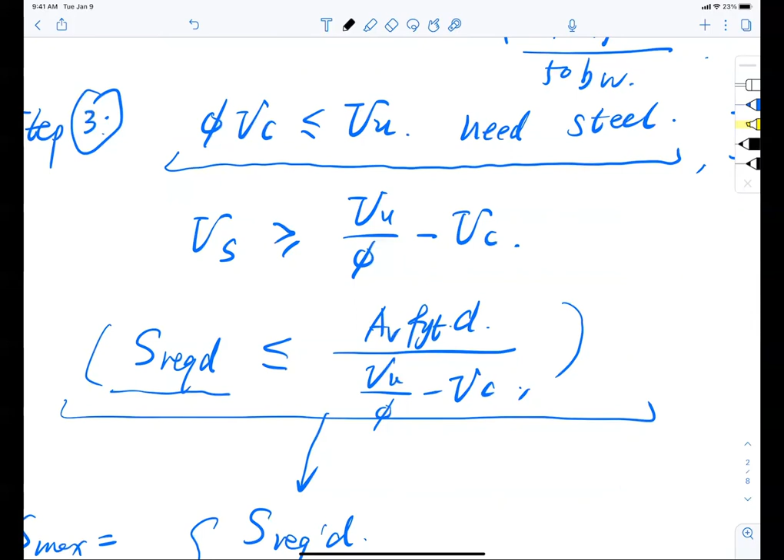What is the equation for the required spacing anyway? The required spacing is right here. That is A V F Y T D divided by VU over phi minus VC. That is required shear resistance from the steel, right? So that is the added term to those 4 terms, so it becomes 5 terms.

All right, so keep going. Now we have that. What if my steel VS is greater than 4 times square root F prime C B W D? What happens? The rest of the 3 terms in the lower position of the column stay the same, but the first two terms change by half, reduced by half. So it's no longer 24 inch, but 12 inch. It's no longer half of the depth, so a quarter of the depth.

Now, last but not least, if my VS is greater than 8 times F square root F prime C B W D, what happens? Increase the section size. So when we try to change the section size for flexure, which dimension do we go for?

Depth or width? For flexure, depth, right? For shear, which way to go? Either one, right? But we usually go with what? The width. Why is that?

Because for T-beam and I-beam, increased width does not increase the occupation of area or space that is so precious for civil engineers nowadays.

You heard this. What is the most important thing about real estate? What determines the price? Heard this before in House of Cards, right? We watch House of Cards. Location, location, location, right? So everything we work with as civil engineers is about locations, about how big a piece of land the investor bought, right?

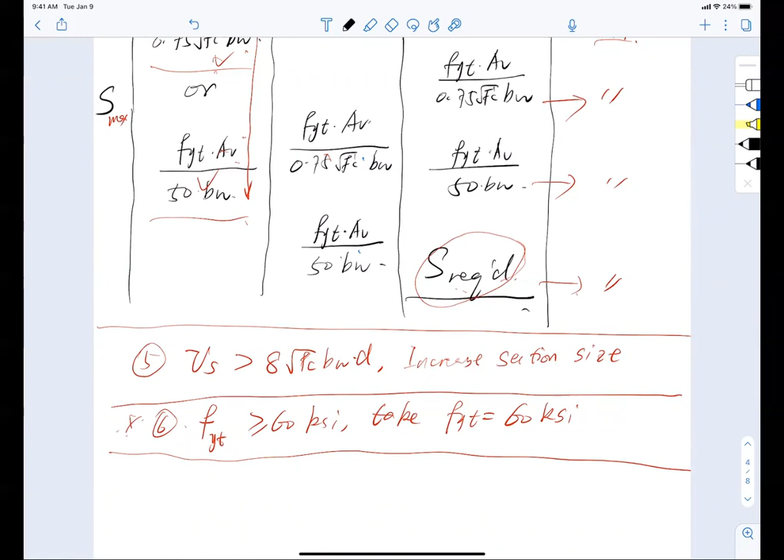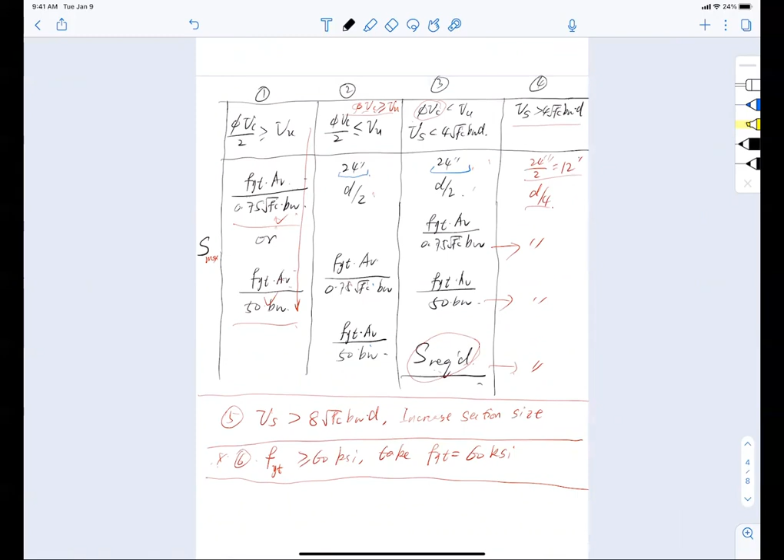Okay, get that. Last but not least, I forgot to mention this: if the yield strength is greater than 60 KSI, take 60 KSI for the calculation, that's it. Our life in terms of shear design is pretty much confined by this tiny table here. It's not too bad, isn't it? Now let's start showing an example, right?

We show the example where we have the critical section about D away from the support. We draw the 45-degree angle always like this, that's how the crack happens. I will ask you guys to draw these cracks in the exam on the critical sections, right?

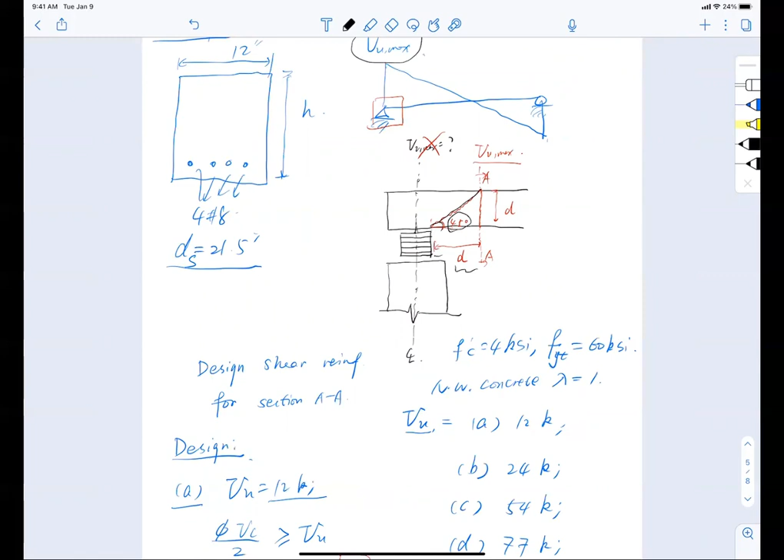So this is kind of like the Japanese animes, right? So you do this sign, right? You do this sign, right? You never do this sign, right? That's too awkward, right? You do this sign, right? Meaning a 45-degree diagonal crack like this, okay? I don't want you to draw like that. Always like this, okay? We'll go through that later.

But anyway, that's where we start. And we say now the concrete is 4 KSI, yield strength is 60 KSI, normal weight concrete, be careful.

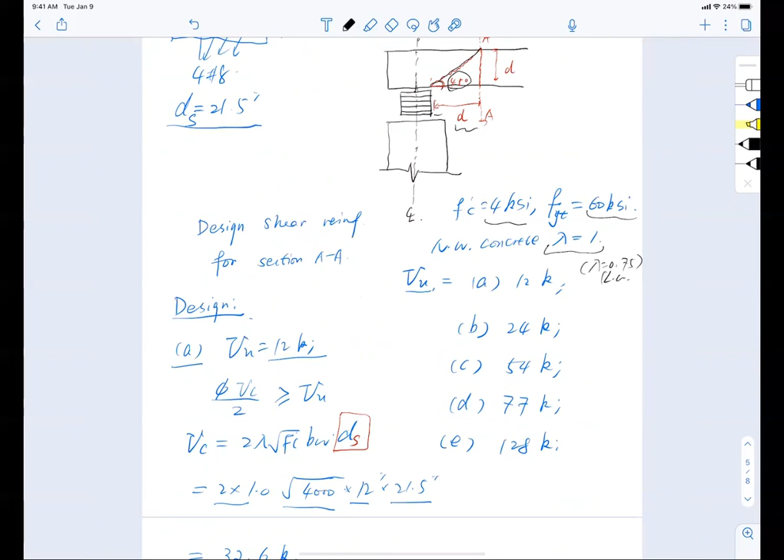This is the best part. I always trick my students. Sometimes I say lightweight concrete at the end of it and don't tell you what that means. That means lambda equal to what? Lambda equals 0.75 when it is lightweight, right? You're not smart, right? You're just okay, right? So you have to pay attention, all right?

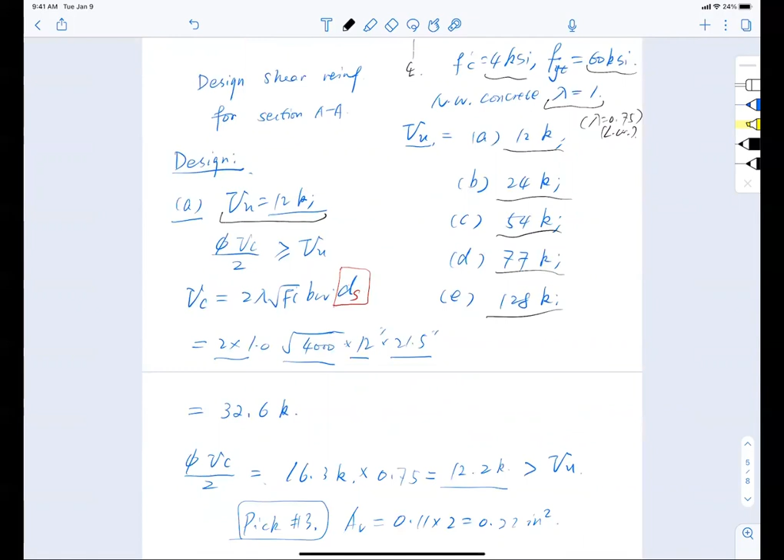Now, we talked about last time, we had 12K, 24K, 54, 77, 128, and so on and so forth. So first thing we do is find out the applied shear, 12 kips, and check whether half of my concrete resistance satisfies this or not.

So it turns out I'm okay, right? Half of this resistance from concrete alone can take care of the applied shear, and we can pick bars. For the sake of convenience, I'm just going to pick number 3, and it gave me a 0.22 inch squared steel area. I went down to find the maximum spacing, which has to be lesser of these 2 minimum requirements, and that gives me 22 inches.

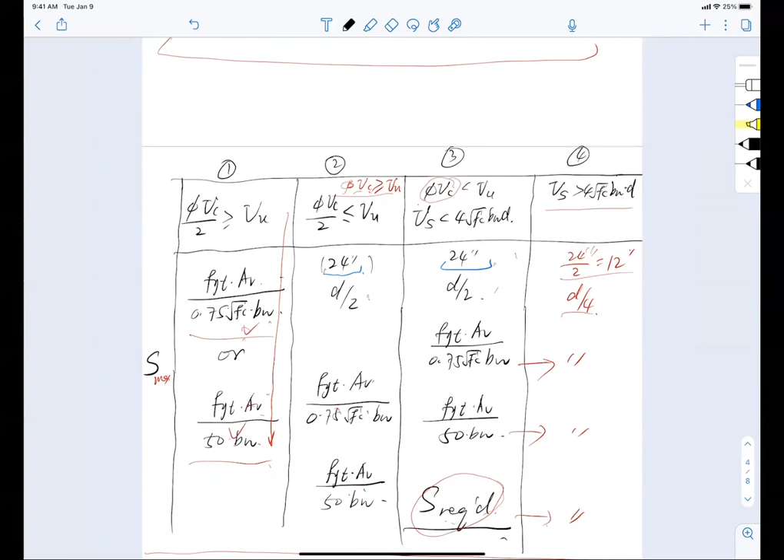When I see 22 inches, I'm okay, I'm happy. Why? Because this number is smaller than 24. Even though this is practice, when you do design you can come up with some weird numbers. For this column, remember there's no constraint about 24 at all for column number 1 — you just need to provide minimum. But still, in practice, as a good civil engineer, I always maintain my spacing lower than 24 inches just to be safe. Call me paranoid, but this is what I do, just to make sure I'm on the safe side. I think that's good practice — keep it below 24 inches.

So then we jump up our shear to 24 kips, and we say, okay, apparently half of the concrete does not cut it. I need to have steel, right? No, not yet. That just means my half of the concrete does not cut it, meaning I need to provide a little bit more reinforcement. It does not mean I have to calculate how much reinforcement I need to apply. Do you understand the difference? Meaning I don't need to calculate, but I need to provide a little more than just minimum.

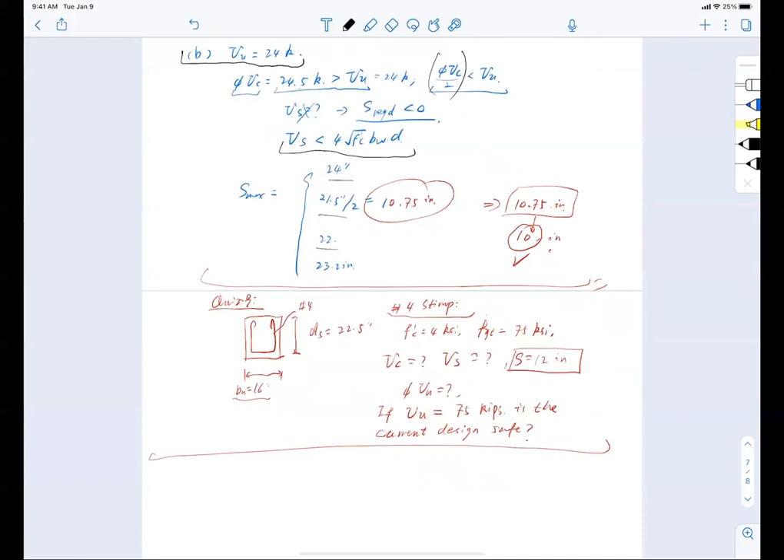So I go on with that idea, I say fine, but I check that steel is definitely smaller than that. So I have 24, 21.5, that is depth divided by 2, then the previous 2 minimum spacing, then I pick 10 inches. Out of this 10.75, calculated from the depth divided by 2, I pick 10 because it's smaller than the calculated numbers. Then I'm left with a quiz, and today we'll continue. Then C.

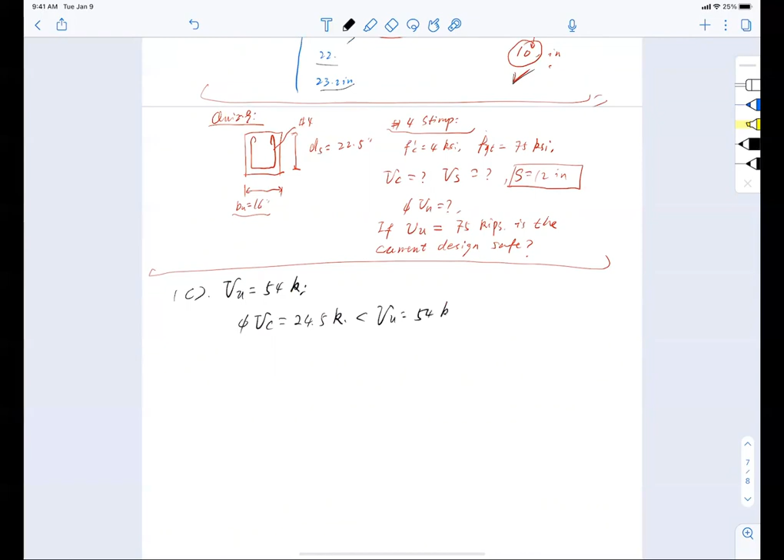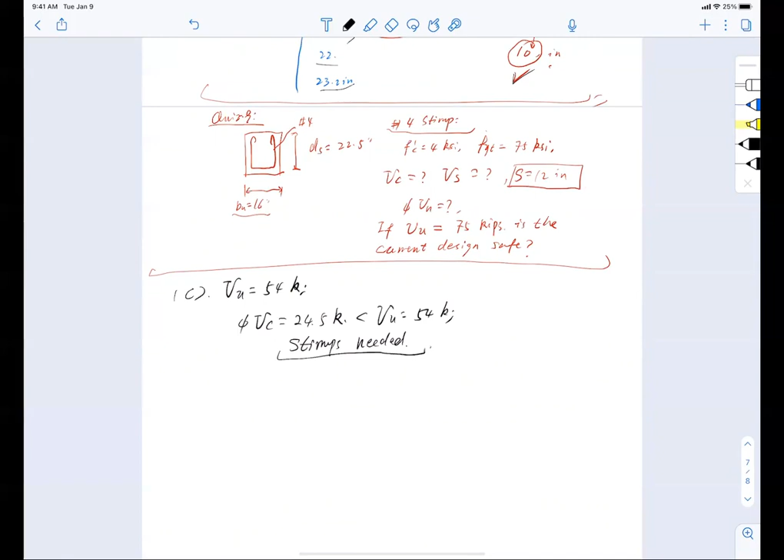When we have VU that is 54 kips, what happens? So now from the previous calculation, I know that phi VC equals 24.5 kips, and that pretty much tells me this shear itself does not work anymore, because this one is definitely smaller than the 54 kip shear force. So immediately I say, well, you know what, stirrups needed. No way you can get out of this one, Bob. Just need to provide stirrups. And to be precise, I need to calculate it.

So how do I calculate it? First, I need to calculate the so-called required shear resistance for steel, VS required. How do I get that? That is basically VU divided by phi, minus VC. So what is VU? 54 kips divided by 0.75, minus VC that is 32.6 kips I previously calculated, and that left me with 39.3 kips. So that is how much shear force I need from the steel.

At this point, should I start calculating my required spacing? Yes, I can do that. And that is AV times FYT times depth D, divided by VS required. So bring the numbers in — I'm picking number 3 stirrup, 0.22 inch squared, FYT 60 KSI yield strength, 21.5 inch depth, divided by the required shear force of 39.3 kips. Folks, check the units: inches squared, KSI or kips per inch squared, inches and kips — so I'm fine, units are balanced. Continuing with this, I got my required spacing S required equal to 7.26 inches.

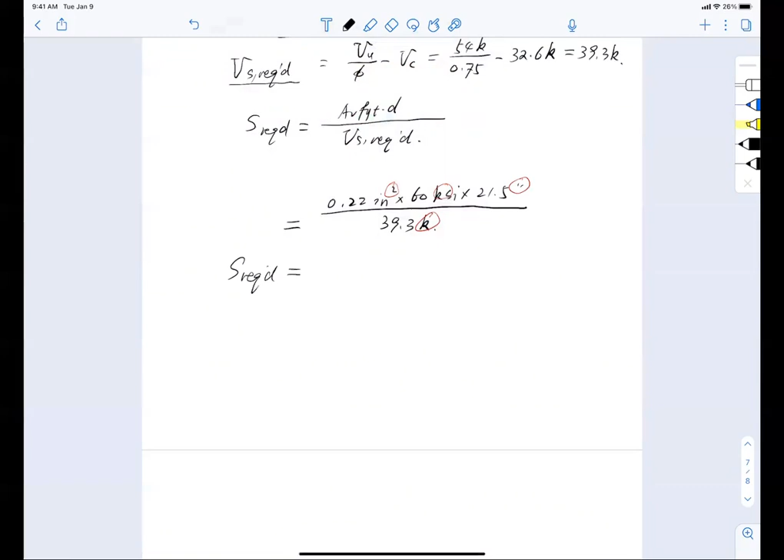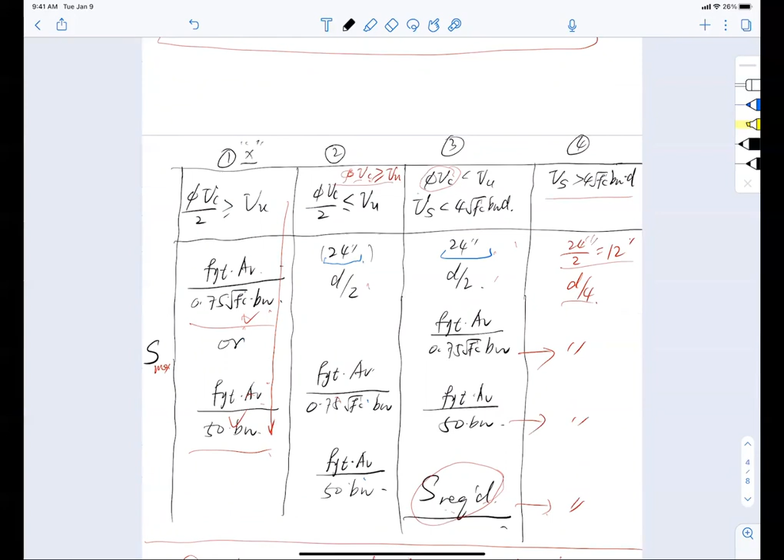7.26 inches. So at this point, I calculate the spacing between stirrups needed based on my required shear force, but I don't know yet if that's the final answer. Why am I saying that? Because I need to go back to my table and see where we are at. So now we're definitely not in category number 1 anymore, because half of the concrete does not cover it. Are we in category number 2? No, definitely not — it's more than that, we need steel. Come on, Bob, wake up, right? Need steel. All right, well, I got you steel. Are we in number 3? Maybe, because you arranged the problem like that, Bob.

But I need to check, right? So what is the criterion? What is the difference between number 3 and number 4? Which one is the criterion? 4 square root f prime c, BWD, right? I need to check that. And just when I'm doing that, might as well take a look at this as well, right? Whether I need to change my section at all. So these are 2 criteria I need to check.

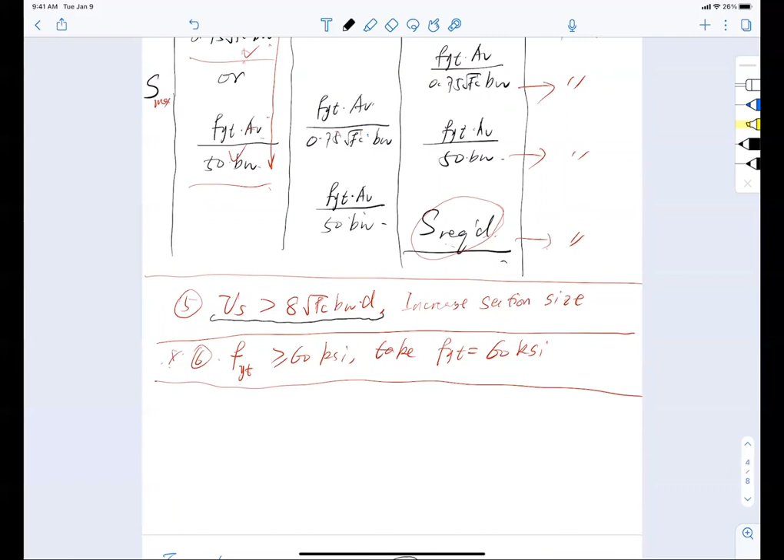So here I'm doing a check first. All right, let's do a check. First thing I need to check is to make sure that my VS required is calculated at 39.3 kips. And it is smaller than what? 8 times square root f prime c. I start from the bigger one, right? And I can calculate it and it tells me it's 130.6 kips. So I'm okay, meaning I don't need to change my section.

Happy with it. And then how about VS required? That is 39.3 kips again, whether it is smaller or greater than 4 times the square root of f prime c BWD. And that essentially is 130.6 divided by 2, and I get this number 65.3 kips. And of course, it is again checked.

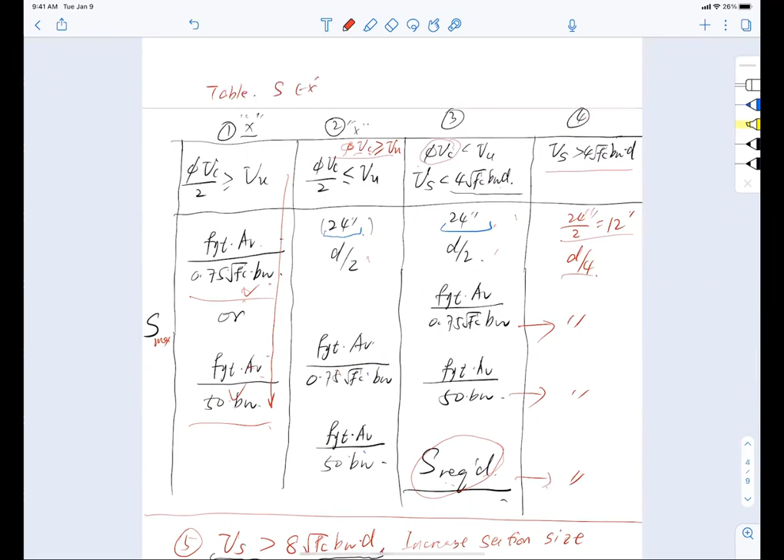So now I can say, by the table, and this is my own table, so I'm just going to call it table star. Whether you like it or not, you can name yourself, right? So this is table spacing. Just call it that. And then I am here in my category number 3. So I know now my spacing has between S max equal to the least of, remember those terms, 24 inches, D divided by 2, we know that is 10.75 inch.

And the 2 small ones, FY, T, AV, D. Do I have a D or not? I can't remember, let me see. I don't, that is 0.75. And the bottom here, square root of f prime c, BW, and that is 23.2 inch. And I have AV, FYT divided by 50, BW, and I got 22 inches. And don't forget, we just calculated S required, 7.26 inch.

Now, out of the 5, which one governs? Which one is the control value? Which one should I go with, 23.2, 24? No, right? You're not dumb, right? I am the only one who's not smart here, right? Which one is the good one? 7.2. Okay, so you know that this one governs, because this is the smallest one.

All right, so I am going to give spacing now. So I need to pick a spacing S that is smaller than this maximum spacing, which is 7.26 inch. So if you were the contractor, what spacing would you pick? I get a 7, it's a 6. Do I get a 6? Why go with 6? It's just easy, right? Hopefully. So I will go with 6 inches to make sure that 7.26 is satisfied.

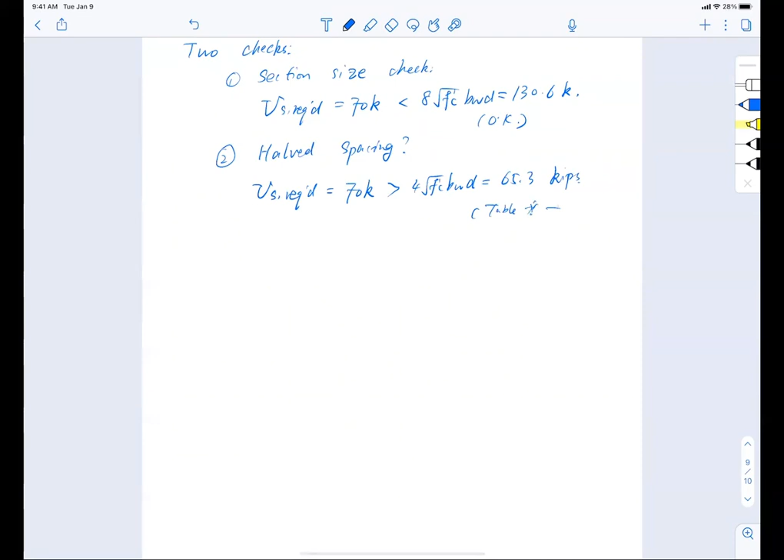What is category 4? That means, and I use red here to remind you, reduce spacing by half. So what do I mean by reducing the spacing by half?

That means my maximum spacing now is the least of, and the bottom 3 stay the same. That is AVFYT over 0.75 square root F prime C BW, and AVFYT over 50 BW, and S required 7.26 inch stays. So this is 22, and this is 23.2, maybe reverse, can't remember now, but you get the idea, 22 inches.

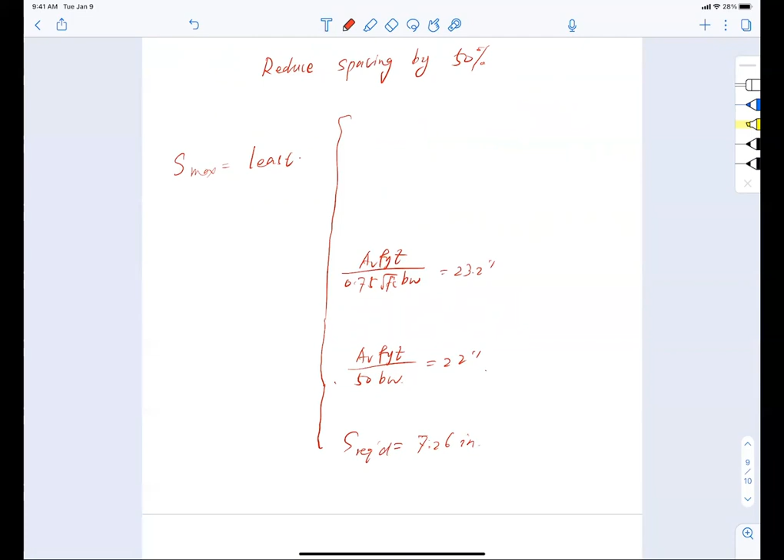But now only 2 numbers need to be halved, okay? Only 2 numbers need to be halved is what? Let me save this one, it's not 7.26, let me save this one. The only 2 numbers need to be halved is 24 inch divided by 2, that is 12 inch.

And D divided by 4, that is 21.5 divided by 4, and I have a 5.3 inch. Ooh, that's awfully small. But we're not done yet, because the S required is different from the previous one.

You have to recalculate it. It's AVFYT multiplied by D, divided by VS required. And VS required has become 70 kips. AVFYT is 0.22 inch squared multiplied by 60 KSI multiplied by 21.5 inch. And I got this number to be 4.1 inch.

Now you look through all these numbers, which one governs? 4.1 inch governs, so this one fellow is our friend. So now I say S better be 4 inch, controlled by this 4.1 inch spacing. So for me now we say design is number 3 at 4 inch.

All right, not too bad, right? So we're happy, we're okay. All right, now naturally let's bump up another level. I want to see what happens. I want to bust my section. I want to fill it.

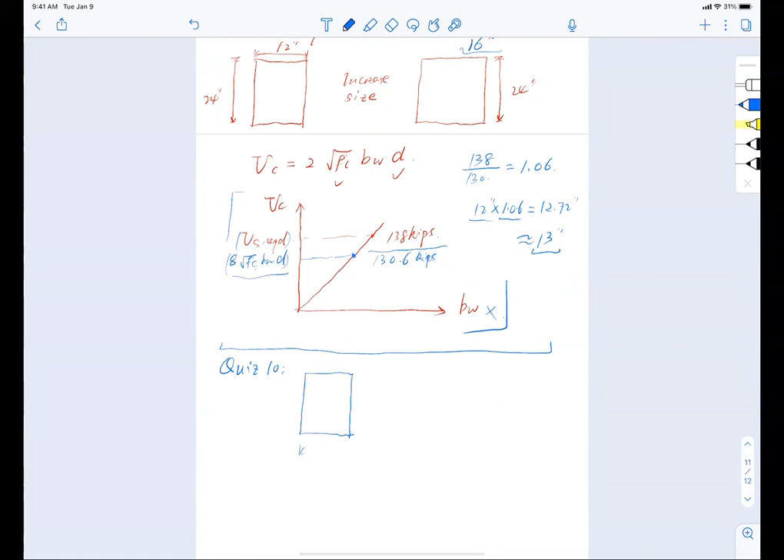Okay, I want you to try this, right? But this time we'll have 16 inches and 24 inches, okay?

And let me increase my bar. I want to use number 4 stirrups. Okay, number 4 stirrups, and give me the phi VN. Okay, let me say number 4 stirrups at 6-inch spacing. Okay, phi VN equal to what? F prime C is 4 KSI, and yield strength FY is 60 KSI.

Okay, nothing else, right? Shouldn't spend you more than 5 minutes on this, okay? Just need to find which one, the equation for it, right? Don't even have to judge the category, okay? All right, so that's it, quiz number 10.

Just one more exercise, all right? Okay, so at this point, you're ready to go. Literally, I should be able to drop you on the job site, say, design for it. And for the building collapse, if I'm not stamping on them, fine, right?

Question, yeah. Is DS still 21.5? Yes, sorry about that, yeah, you're right, DS 21.5 inch. Thank you.

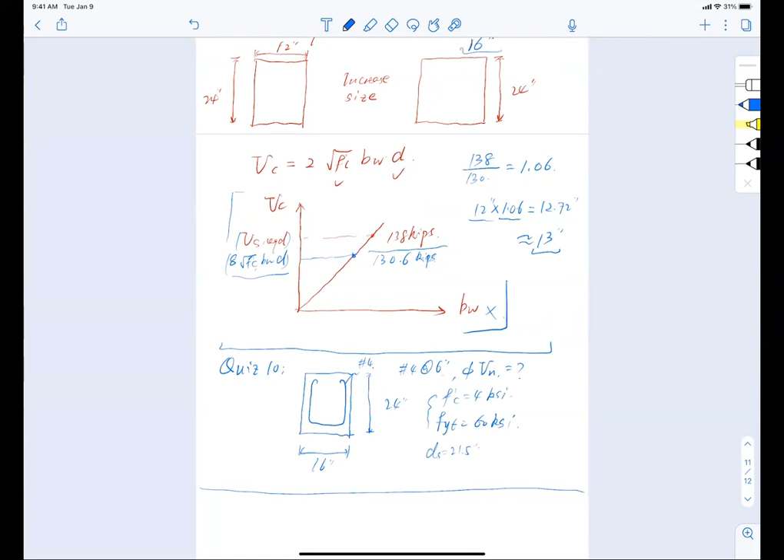Yep, okay, but like I said, if I throw you right now to the job site, you should know how to do shear, at least check it. Just check it, right? To see if that hits the mark or not, right? Okay, so that is pretty much the basic stuff.

All right, before we go on to the complicated one, meaning variable stirrup spacing, right, I want to show you something else. Okay, one thing we haven't talked about is that you see here.

How do I determine VU max? Well, I don't know, Bob. You gave me a number, I work with that. In the exam, it's probably going to be the same thing, right? But on a job site, they will not be as kind as I am to give you a number. You have to figure that out yourself.

So where can you get shear in the first place? There's something called a diagram, remember? Something called a shear diagram, remember? Something called a free body diagram, FBD, remember, right? We got to do the statics first, isn't it? We got to do that, right?

So how do we do that? Well, I don't know, Bob. It's just straightforward. If I have a simply supported beam, I can just get the shear. For example, if I have a distributed load, let me save the effort and just draw it: a distributed load shear diagram looks like this. And I just need to pick out the maximum number, right? And we go with that.

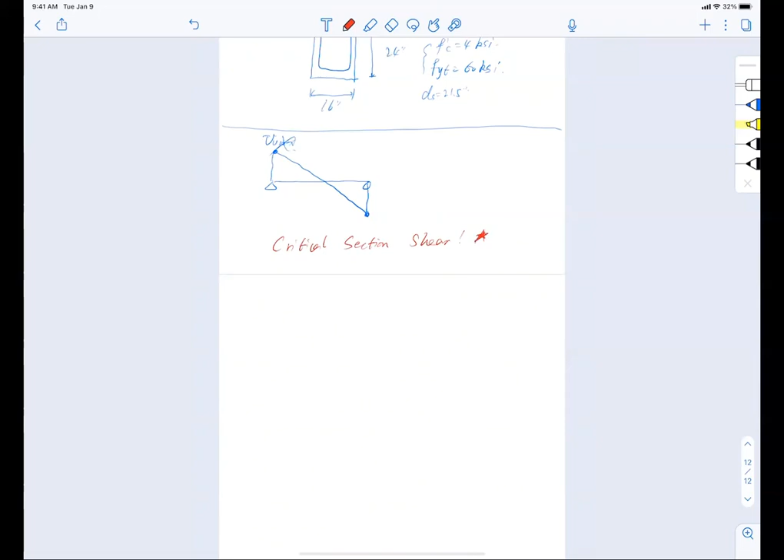Okay, and this is very important. I will have at least one problem in exam number 2, a drawing problem, asking you to draw where the critical section is at, okay? I cannot be more explicit than that, okay?

So you need to understand, so the reason for it is, if you take a look at ACI, in the section of 4.4.3.2, it says, I just want to make your life troublesome. I don't want you to have an easy life, right? You cannot just draw a shear diagram and find the maximum force, cannot do that. Matter of fact, here are the list of conditions you have to follow.

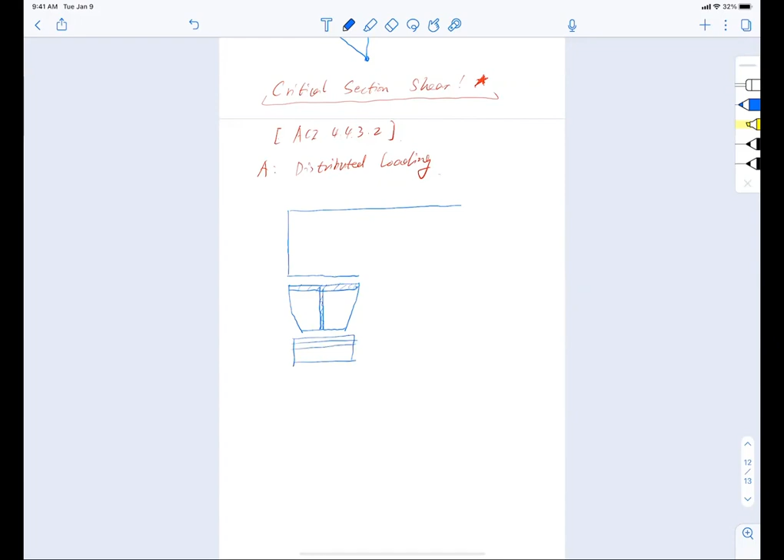First is called distributed loading. It means that when I'm about to pick the shear, I need to take a look at the details. So if I draw my beam, and nicely at the end of it sits here, because that's where most likely my maximum shear force is going to be at, and I'm going to draw my nice neoprene pad right afterwards, right underneath it, and I say the support's going to be something like this, and you might even see some steel reinforced support, just some rib plates here as a welded T-shape, and then have a nice neoprene pad underneath it to reduce the stress, nice cushion. And then finally, I have a column sitting underneath it.

Okay, and in this case, the shear diagram, this is more like a blow-up drawing, a zoom-in drawing of the end of this support right here. And this is a distributed load, okay? Uniformly distributed, well, not uniform, but distributed load, okay? So this is what this one looks like, zoom-in version, right? And ACI says, look, since I have a 45-degree angle of crack, matter of fact, I know that I have two sections going to be critical.

Two sections are going to be critical. What are those two sections? I say that if this is the center line of my support, and translate that into my shear diagram, this is exactly where my maximum shear force is at.

Remember this fellow here, the support here? And when I draw this diagram, this is actually the VU max, right at the center line of the support. But ACI says you need to pick the shear right here, lined up with the edge of the support. And I call this critical section CS1. That means I need to pick up this number instead to design.

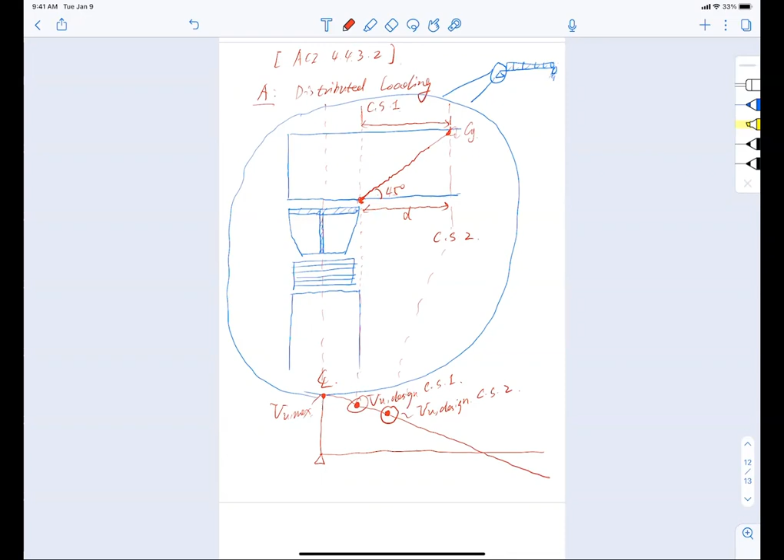So there are two critical sections for this scenario A. You think this is over? This is like John Wick number 1, right? Chapter 2.

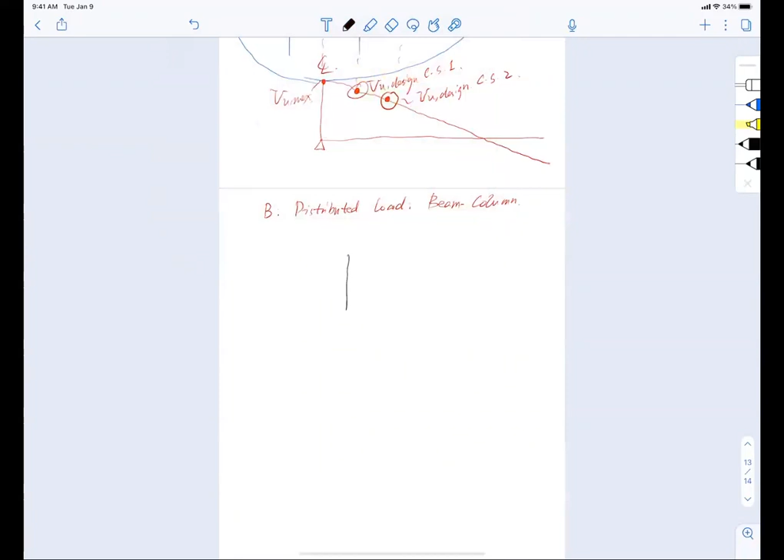Now I have a joint. Again, this is under distributed load - beam, column, joint. So now if I have a column that looks like this, cut from the top, and I have a beam like this, joint right here. And mind you, when I say distributed load, I mean I have loading on the shoulder of the beam - these are my distributed loads.

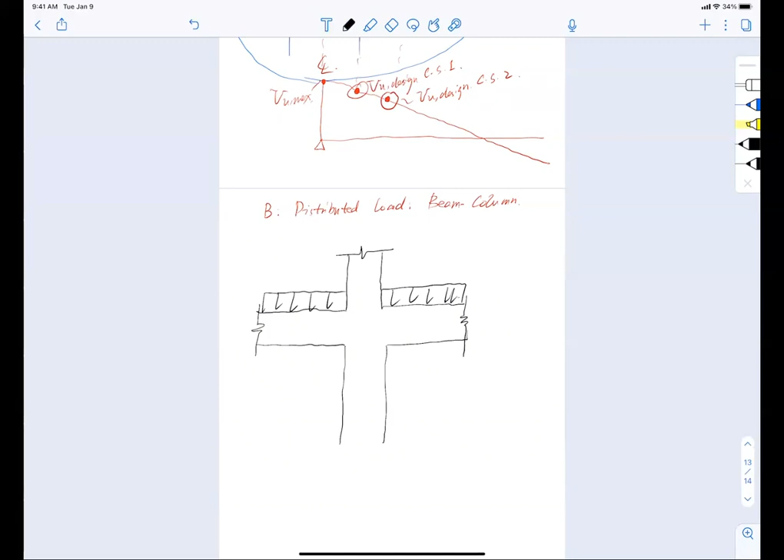Now if I draw the shear diagram, I want to find the location of the critical section and find the shear stress. And now remember I said Ultraman, the Japanese animation thing, remember this? I said always like this, not like this, remember? Well, I lied, just in this case, I lied.

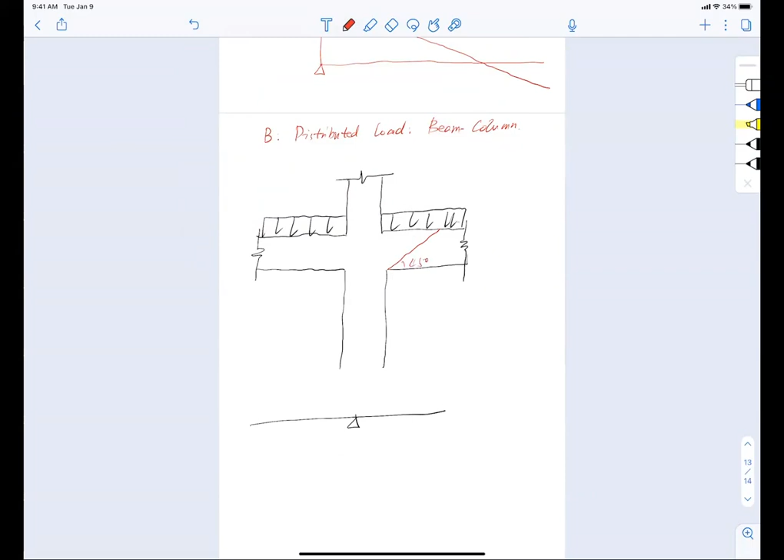Why am I lying? Because this is at a continuous support, and the shear failure is a bit different. Why is that? It's kind of like this - the crack on the right-hand side goes like this, 45 degree, but it is symmetric, it goes this way as well.

So just in this case, it's an exception. So now we do not have to worry about this cut anymore. I put a cross mark so you know this is not it. The only critical section is going to be distance d away from the edge of the support, that's it. So CS, critical section here, critical section here.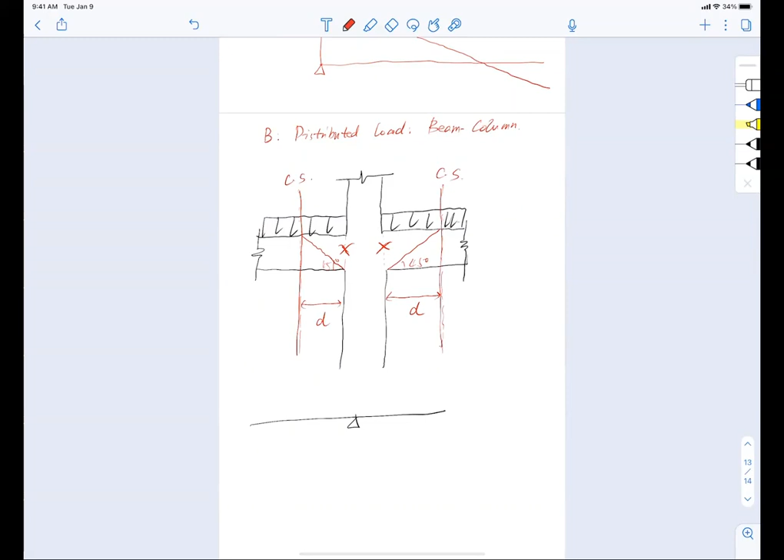And literally every year I have an identical problem just like this design. And guess what, every year you guys make mistakes, okay? I see all kind of weird stuff. I even see something like this - I don't even know what's going on. So remember this figure, it cannot be simpler than that.

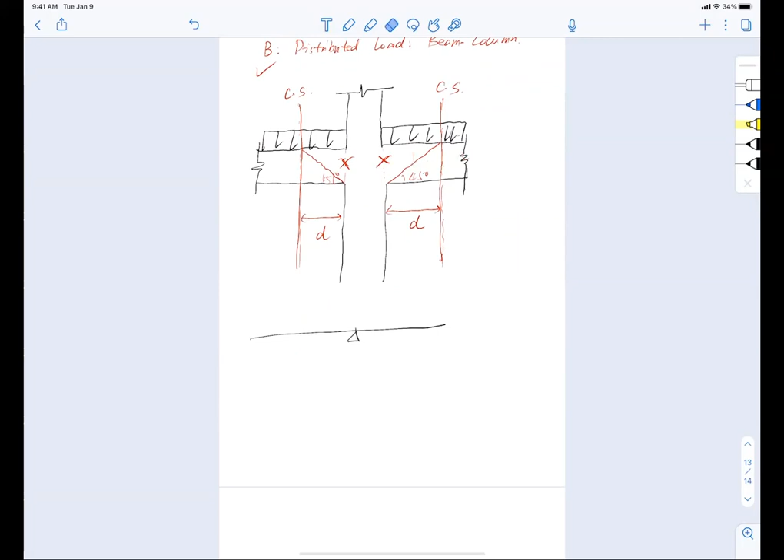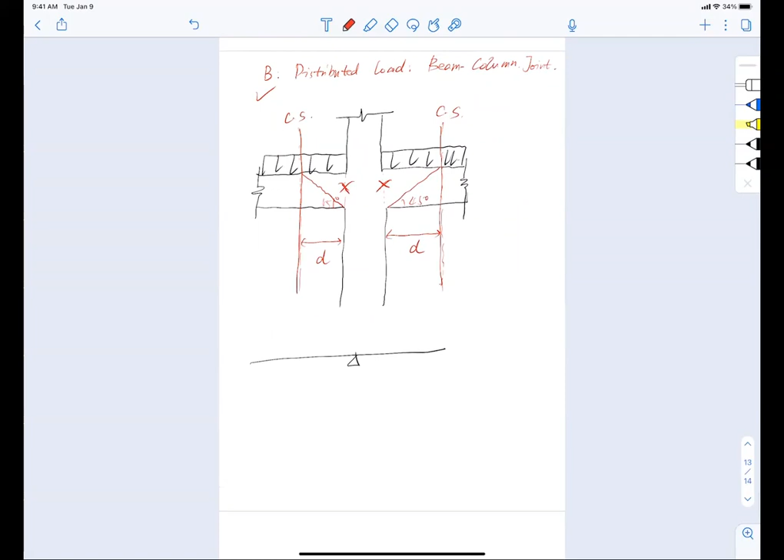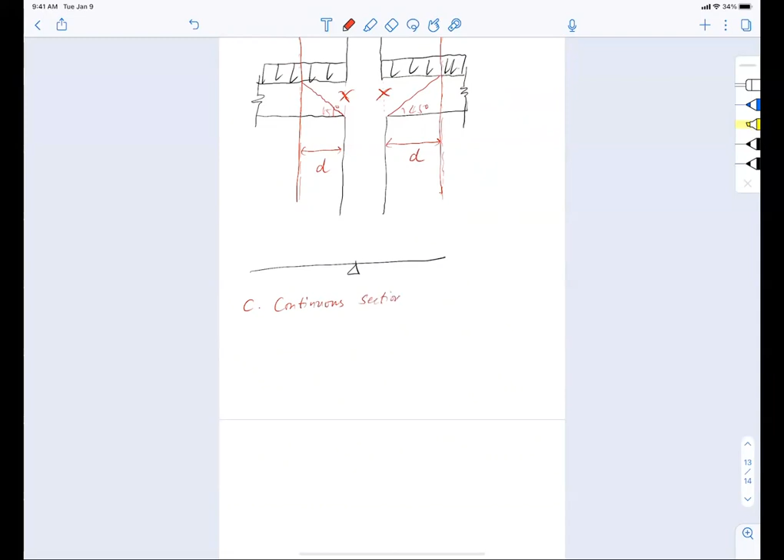So B is distributed load, beam column joint. All right, C is a little bit different, but C is kind of an extension of that - C is a continuous section, continuous section of beam column joint. It's basically the same, but instead of one, I have a lot of end joints.

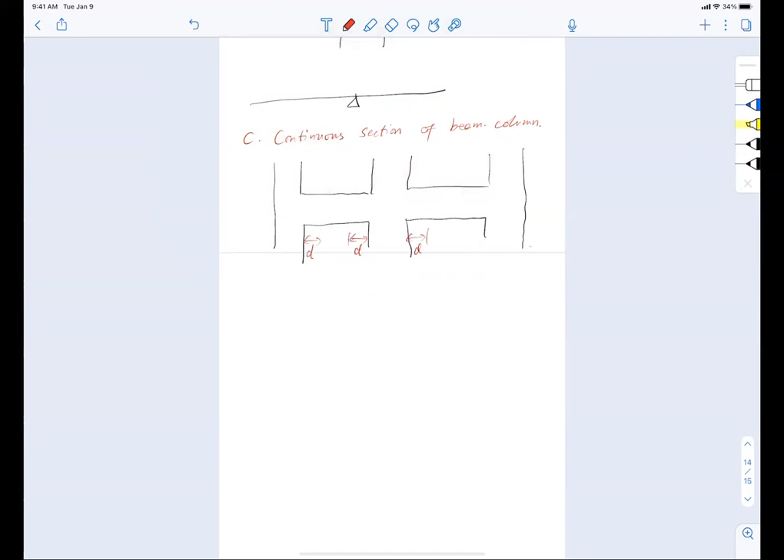So I have this kind of scenario, and this is no different. So the critical section is going to be distance d away - sorry, let me switch color - distance d away from here, d away from here, d away from here, d away from here. And if you don't know how to draw it, I can show you: the crack goes from here to here, here to here, here to here, and here to here, always from a lower end to the top.

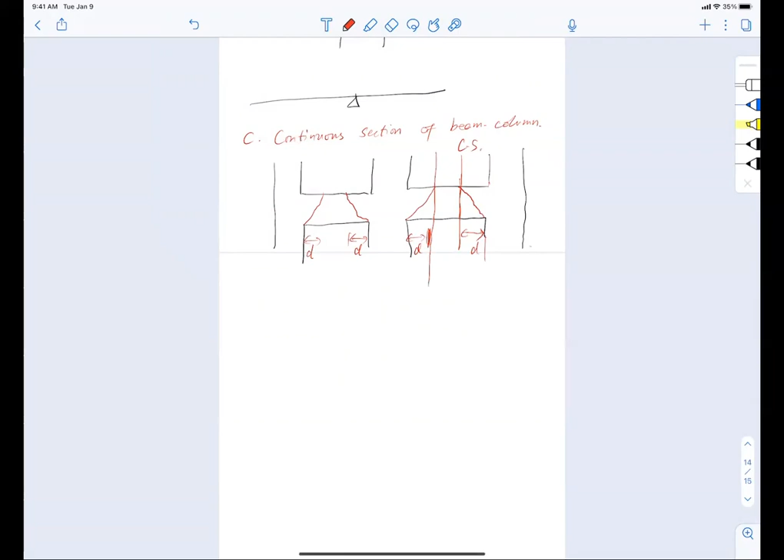And this is critical section, distance d away, critical section distance d away, same thing here, same thing here.

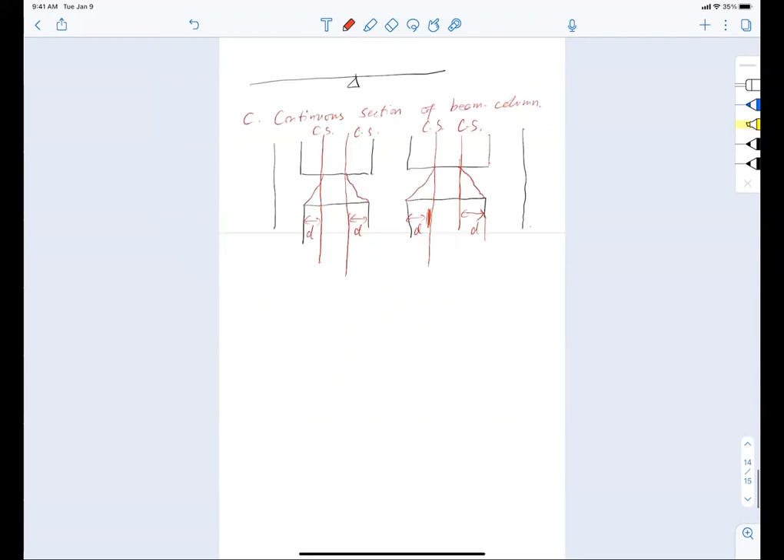Okay, and that is not too bad. Now, when we are just about done, he says, wait a minute, there's an interesting case, it's called edge load.

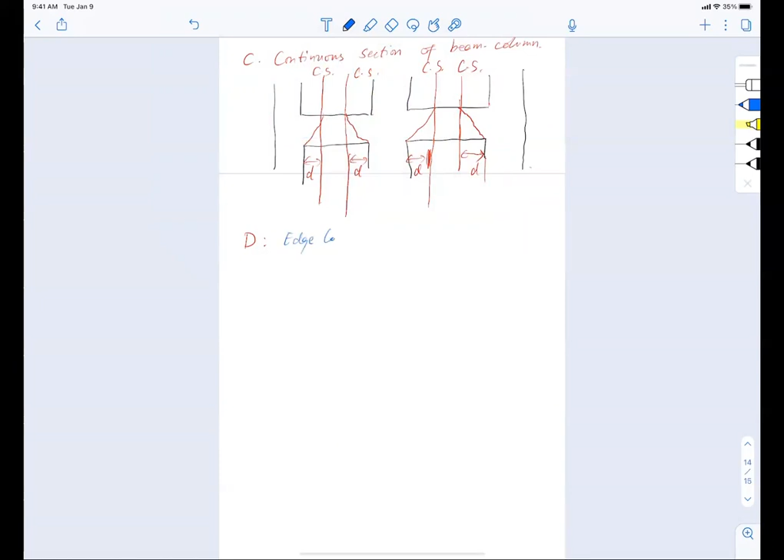And from a glance, it looks just like a beam end, beam end sitting on top of the column as we show in case A. And when you go to say I have critical sections, here and here. Don't worry about it, it's gonna be the same, but now this is 45 degree angles.

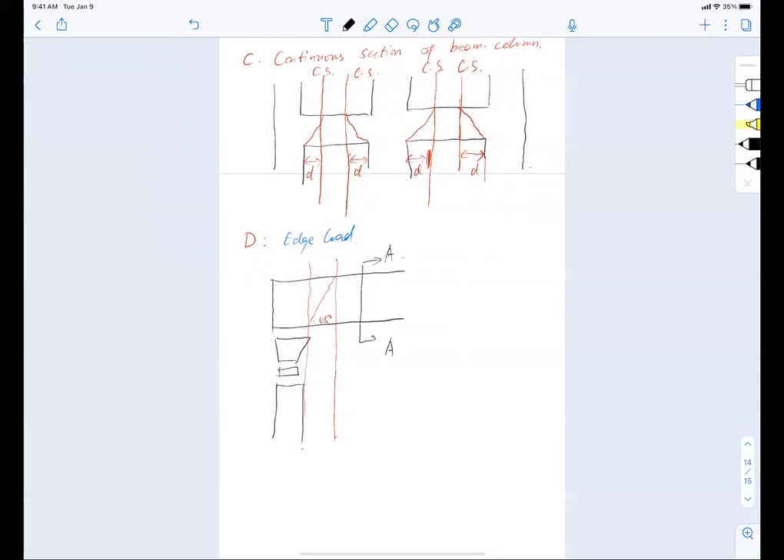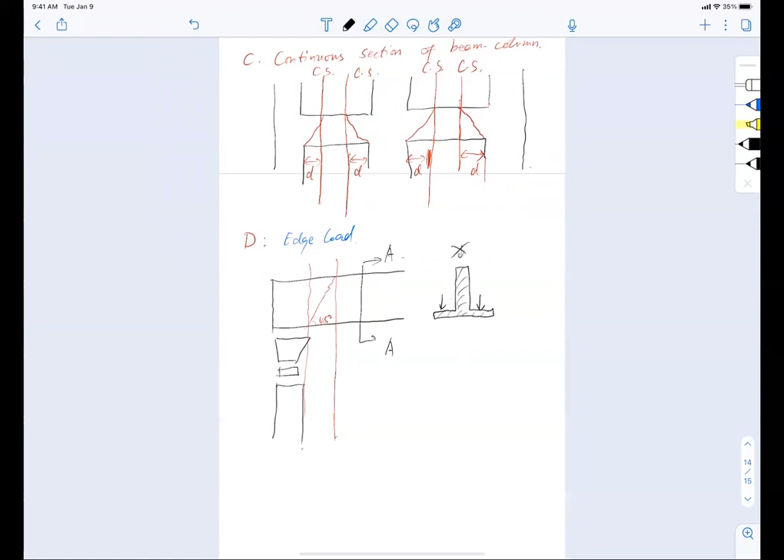And this cut right here, if I do a cut like this, there's a lip for the section. And my distributed load is no longer on the top, but right here instead. So critical section here, critical section here. Let me just finish this, and I will also have 3 other cases.

One is D, and this is D1, I think. D2, I have a hanging over beam, just like this. And now on top of the distributed load, I have... and we know how to handle that, right? That is distance D away from the edge of it, and call it critical section.

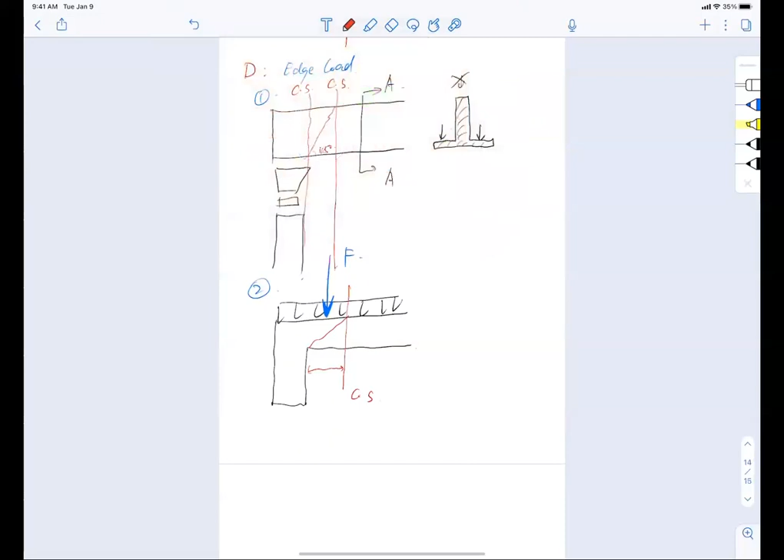But instead, on top of that, if I ever have a concentrated load, let me just draw right here. If I have a concentrated load, force here, I need to add one right here on the spot. So 2 critical sections.

Now, have you guys seen the balcony? Nice European structures in Paris, you know, near Eiffel Tower, they have a lot of old buildings. Even in New Orleans, they have that too, French Quarter, whatever. And you have seen those balconies, right?

And for the balcony, I have this beam as well. And normally I have a distributed load here. And this beam is sustaining a tension force. So I also need to check my shear here. CS.

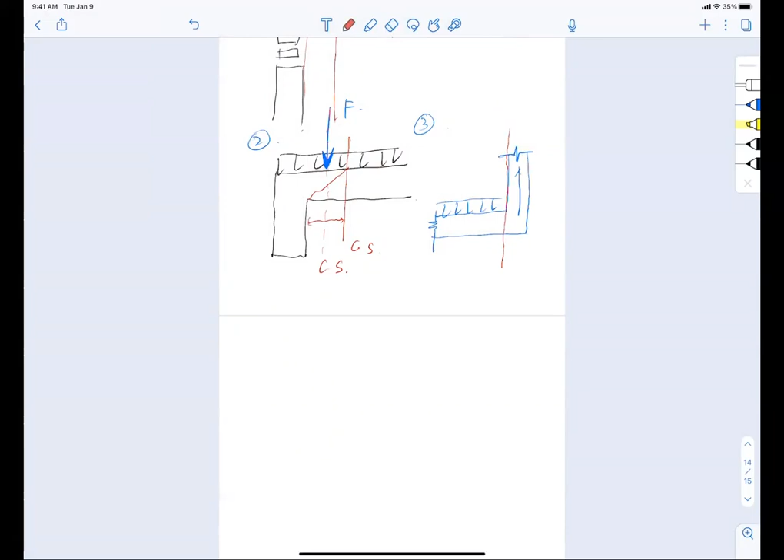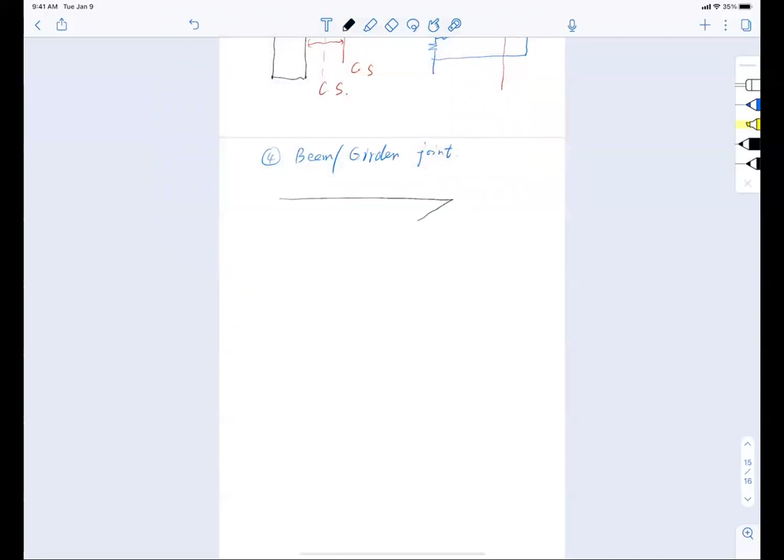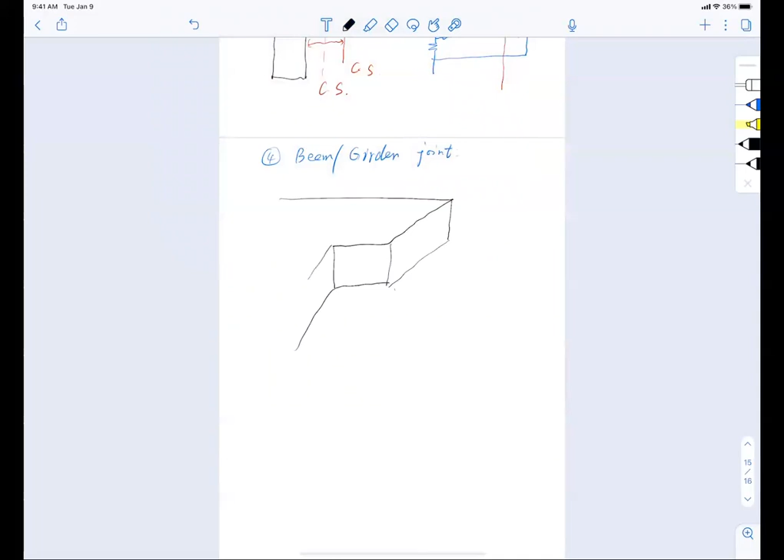Last but not least is what we call the beam and girder joint. In plain language, it is just a big beam here. Let me try to draw my 3D drawing here. And then a joint by a small beam right here. And that's my cut.

So besides all those conditions, this blue shaded cut is the critical section here. Critical section right here. I think I got it. And this is my beam, and this is my girder. And that is my...

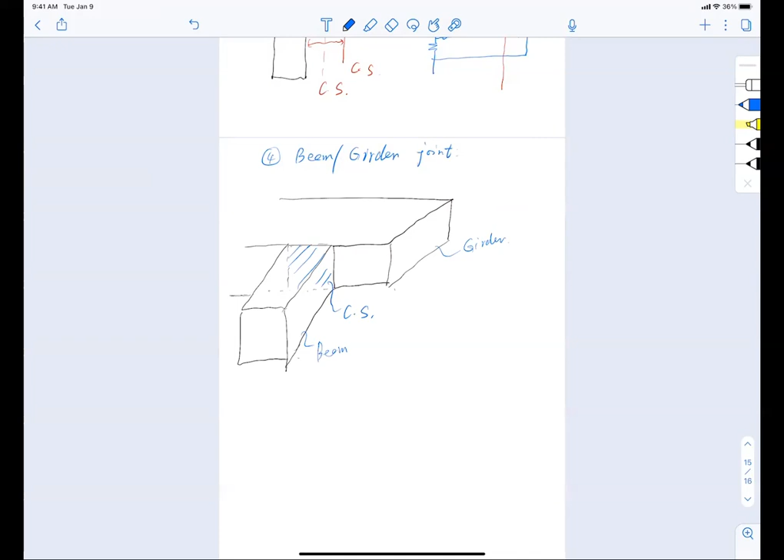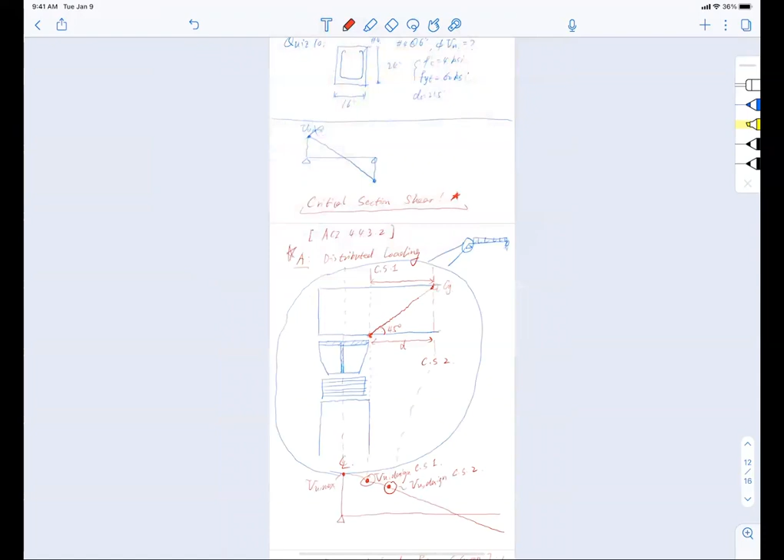So that is my critical section. That is my critical section. All right, so you have seen so many of them. In the exam, let me tell you right now, in the exam you will see this, for sure. You see this, for sure.

And you will see this one here, for sure, and here. Only 4 cases I will test you guys on. The rest, you know where they are, and they probably don't care so much.

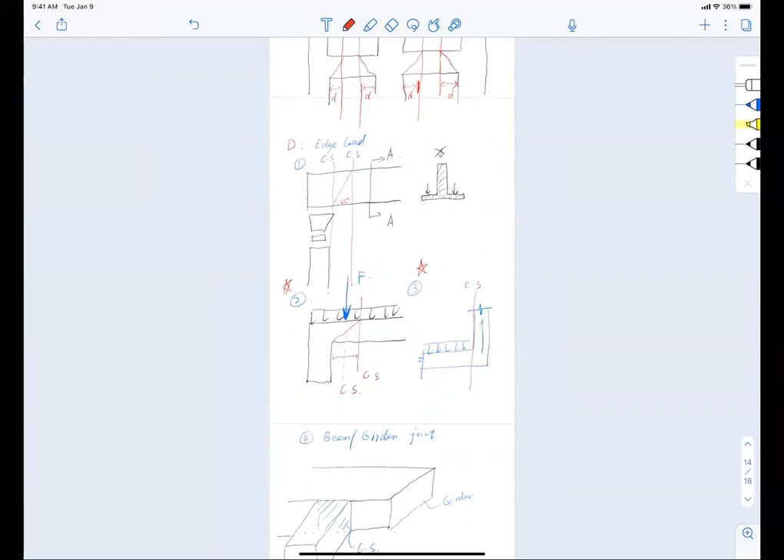All right, and now that's how we're gonna do the shear design. And why these are so important, this is why. One more thing, and it won't be long. Let me just show you why we need design. This is pretty much for next Monday. Design for varying spacing S.

Design for varying spacing S. So what really happening is that we now know there are so many critical sections. If I draw a shear diagram of a uniformly distributed loaded and simply supported beam, I know that my shear diagram looks like this. And I'm going to design a section for it.

Here is my dilemma, right? I know there are 2 sections that need to be checked. One is near the edge, the other is at a distance D away. And let's just say I'm going to use distance D away to save all my effort. So this is VU max, fine, but this is VU design. I just won't be lazy. And I zoom in on this fellow right here and look at the triangle.

Look at the triangle, all I'm doing is I just need to design for shear, and for this value here, that is VU design load. And I use this shear force to determine my stirrup spacing. So let me ask you a dumb question: if I have a given shear force, one shear force value, how many spacings can I come up with?

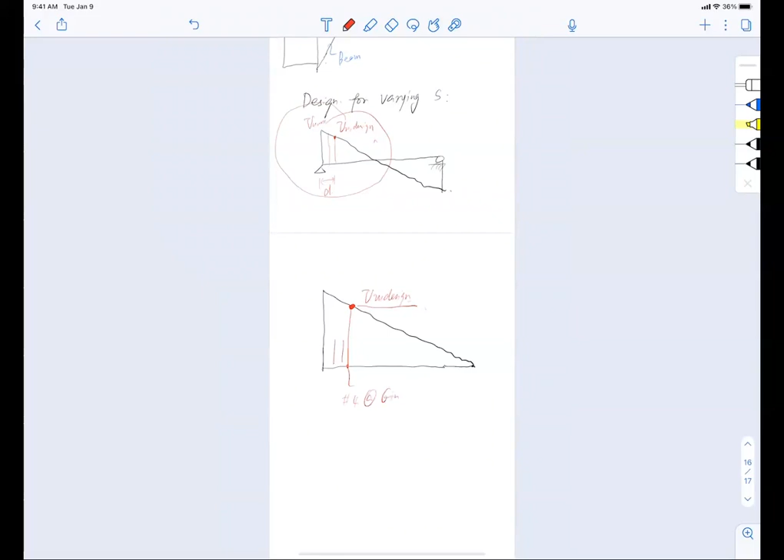With one shear force, how many spacing can I come out with? Come on, it's not a trick question. How many? One, right? I can only get one. What does it mean? It means if I come up with a spacing of, maybe, #4 at 6 inches, it means I'm going to have 6 inches of stirrup spacing all across.

And everywhere along the section, I'm basically saying I'm going to have a shear resistance of VU design across this half span of the beam, isn't it? If you present this design to me, I'll say, good job, 90 points.

A, graduate, go to the job site. Which is not the case, but I'm just exaggerating. And then if you take this design to your boss, he's gonna say, who taught you concrete design? You say, Bob, and they're gonna call me and I might lose my job. Why is that? Because he will tell you, you young, foolish engineer, look, this is what we need and what we get paid for, and yet you gave me this.

That means all this is what? Extra. Extra cost in stirrups, right? Extra cost in concrete, extra in everything. And in civil engineering, extra in safety is good, but extra in cost is not good, isn't it?

So what are you gonna do? You say, well, can I do a spacing in such a fashion that I can just do a nice spacing, barely covering the line? That's the optimal solution, right?

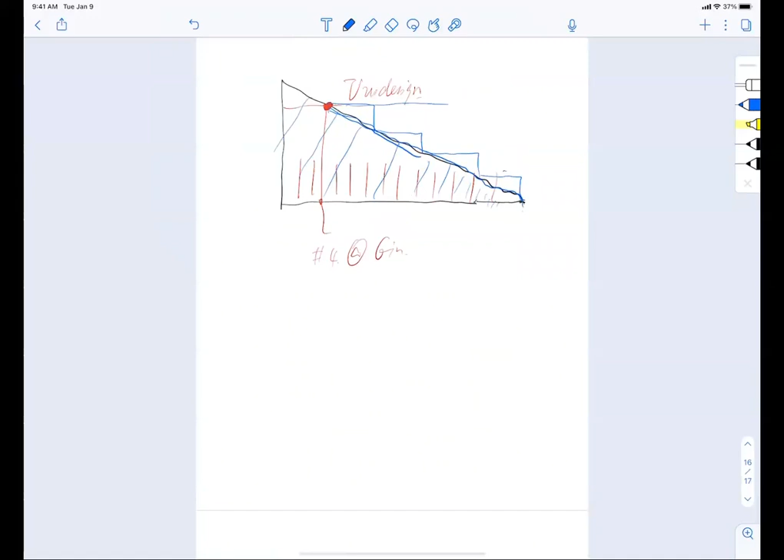All right, I can do that. I can do small rectangles. It's not the best, but surely a whole lot easier than this fellow here—much, much more economical than the big giant rectangle there, isn't it?

So that means if I have a 6-inch spacing here, I have to reduce my spacing to reduce my strength a little bit. So maybe I can do 6 here, 4 here, and maybe 2 here. Oh, I don't even do anything here—maybe just let the concrete take care of it, but provide some AV min. Remember, I need to provide some AV min. I'm fine, isn't it? All right, I can cover it.

So this design strategy is called what? Various, or varying, spacing.

Wouldn't the spacing increase because you're decreasing your shear? Oh yeah, you're right, man, thank you so much. I forgot. So 12, 24... oh sorry, 12, 24, nothing.

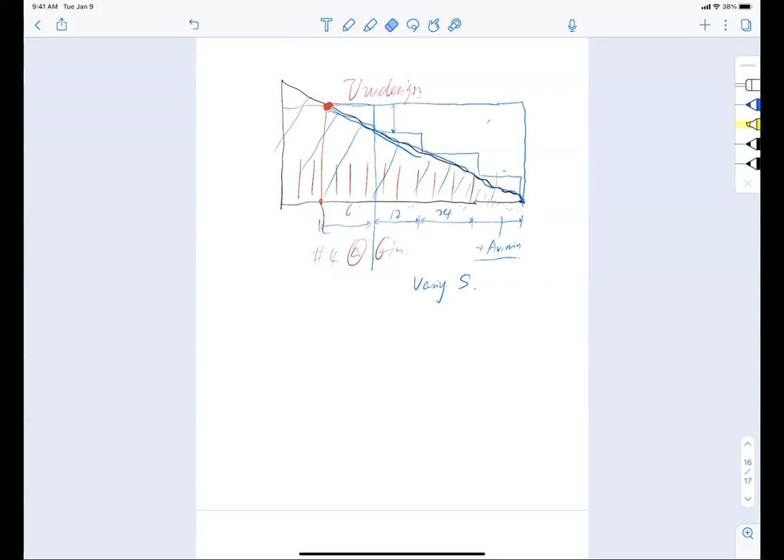Okay, varying spacing. So what does it translate into? It translates into a visual image of when the guy up there at the job site tries to tie up the cages. What the guy will see is this—now, this is the top bar. And by the way, does the top bar take care of compression or tension?

Well, you learned this part, right? Do I hear tension? Compression or tension? Compression, usually, okay? In a simply supported case, compression. If you guys lost your confidence—tension, no. Here, tension, right? But I see reinforcement in terms of cages.

Now, I'm only talking about half span. So what really translates here is that I may have 6 inches here in this zone, and I start to have more spacing, and start to have more spacing, and I stop cold turkey from here, no spacing. And maybe provide one bar just to avoid that 24-inch dead zone. That's it. So that is very economical, right?

And then you present this design to your employer, and please tell them you took a class from me, right? And you say, oh, I took Bob's class. Who's Bob? Chenglin Bob. Oh, okay. Right, do that. All right.